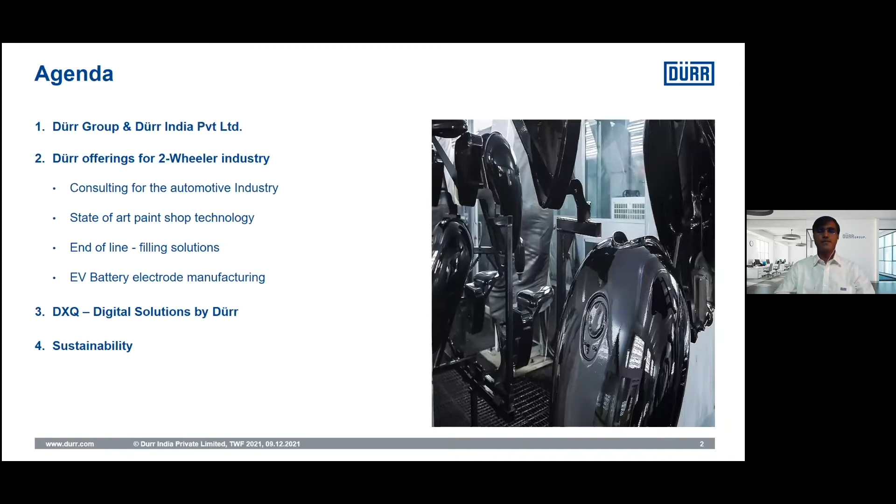So let's start with Dürr Group and Dürr India. Dürr is a global market leader in plant engineering solutions for automotive industry, which began its journey about 125 years back in 1896, founded by Mr. Paul Dürr with a sheet metal processing company.

Over the years, Dürr pioneered several benchmarking technologies like Eco-Rodip for e-coat application, AGVs for paint shop application, Eco-Bell applicators with color change time in just 4 seconds, Eco-Dry Scrubber Booth, 7-axis robot without a rail, and VOC abatement system for paint shop, and the latest is 100% overspray-free application technology, just to name a few.

Dürr Group operates under 3 global brands: Dürr Systems AG, Carl Schenck AG, and Homag Group AG. All are market leaders in their respective markets. Dürr Group is a 4 billion euro company with over 16,500 employees. In 2020, due to the pandemic, major investments took a hit, with net sales of 3.3 billion. However, in 2021, we expect to exceed 4 billion in sales.

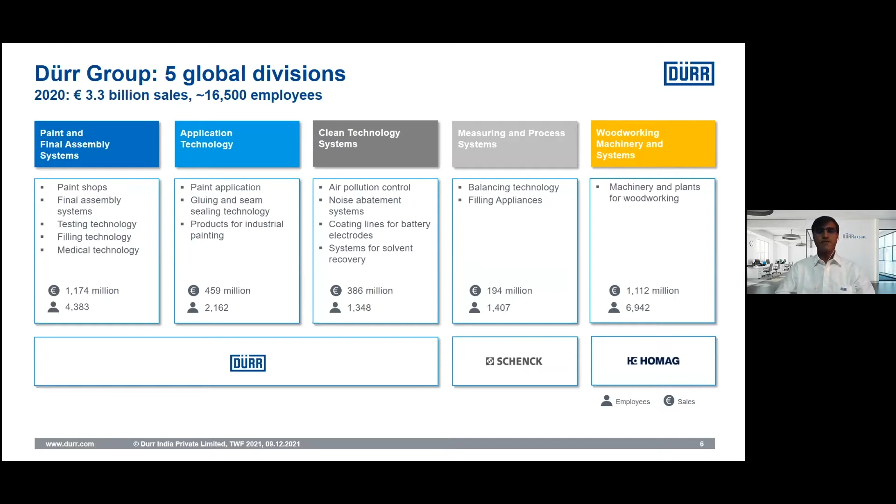Dürr operates under 5 business units: paint and final assembly systems for turnkey paint shops and final assembly lines, application technology for paint robotics and circulation systems, clean technology for exhaust air pollution control, measuring and process systems, and woodworking machineries and systems. Dürr in India is also celebrating its 25th year in financial year 2021-2022, with 341 employees serving 30 plus OEMs.

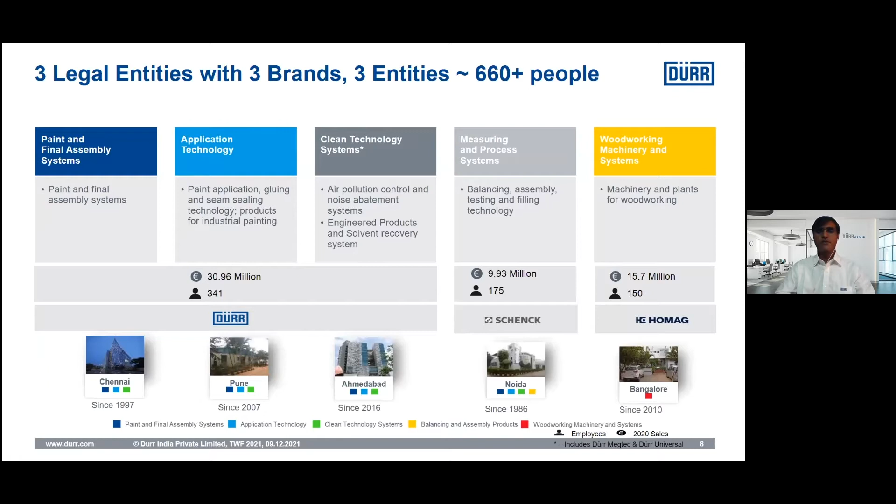And more than 50 plus installed plants, with headquarters in Chennai. Dürr India operates similar to Dürr Group with 5 business verticals, and has strategic presence across the country from Chennai, Pune, Ahmedabad, Noida, and Bangalore. Dürr India's journey for the two-wheeler industry began in 2010 with the first two-wheeler paint shop for Mahindra two-wheeler.

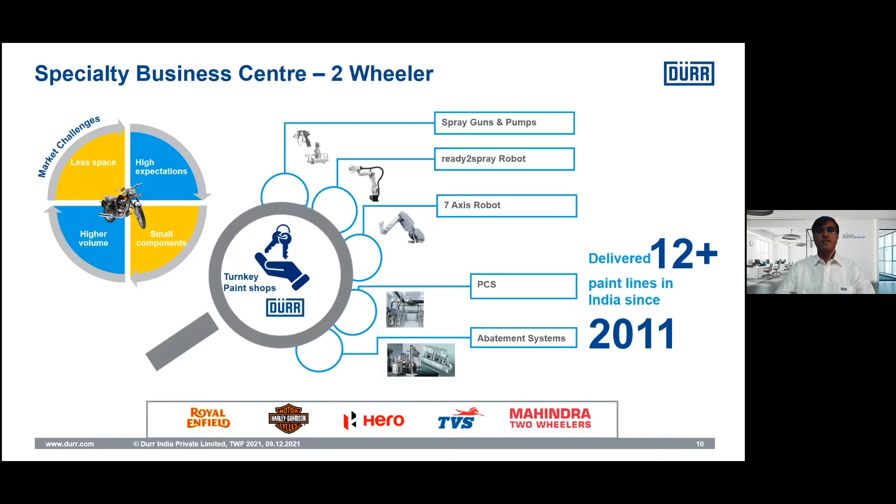Followed by Royal Enfield, TVS, Hero, one after the other, and Ola Electric in the last year. With a cumulative volume of more than 50%, two-wheelers in India are produced today from Dürr paint shops. Dürr India within Dürr Group is also recognized as a Center of Excellence for two-wheeler business for the global market, with expertise and learnings of over a decade now.

Let's look at what are all those two-wheeler Dürr offerings for. Dürr specializes in complete solutions from factory planning and consulting to body and paint shop, pre-assembly, and final assembly lines, with digital solution integration and MES, irrespective of third-party PLCs.

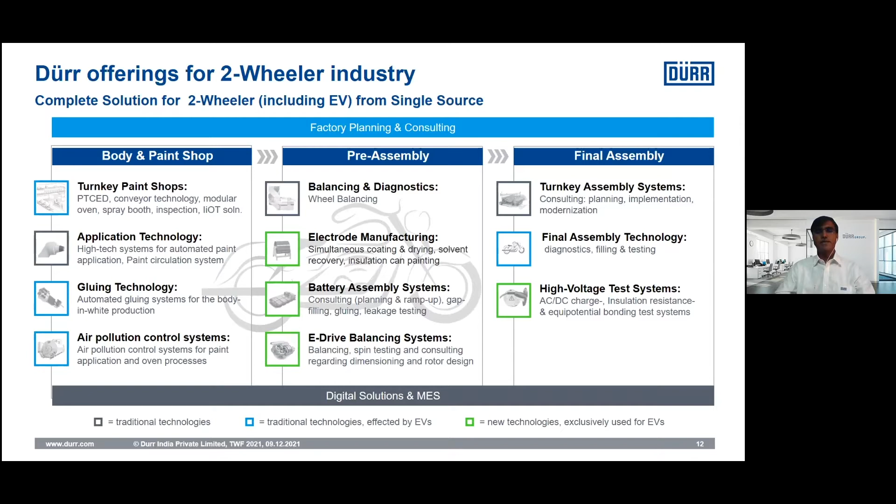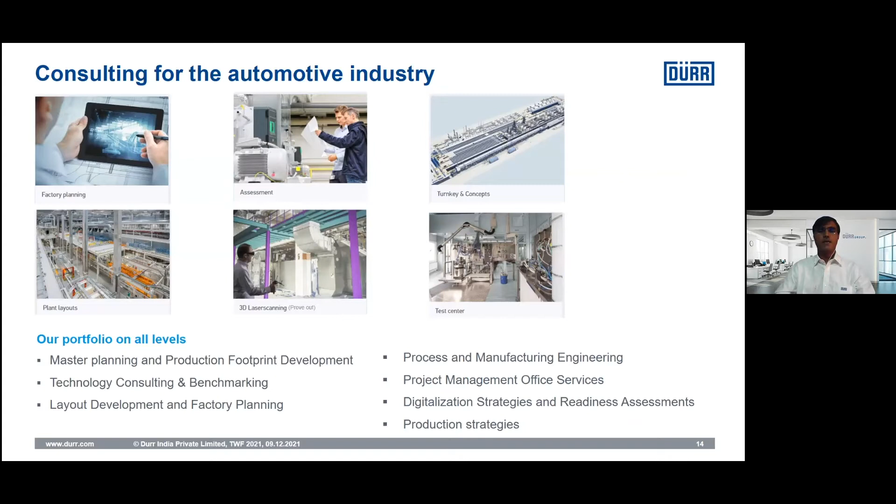The green box items are the latest technologies for EVs, like electrode manufacturing, battery assembly systems, e-drive balancing, and high voltage test systems. With its process know-how and expertise over the years, Dürr offers consulting for the automotive industry to realize your idea up to SOP. The range of consulting services includes factory planning, assessment, turnkey and concept development, plant layout evaluation, handholding until go-live, and establishing test centers too.

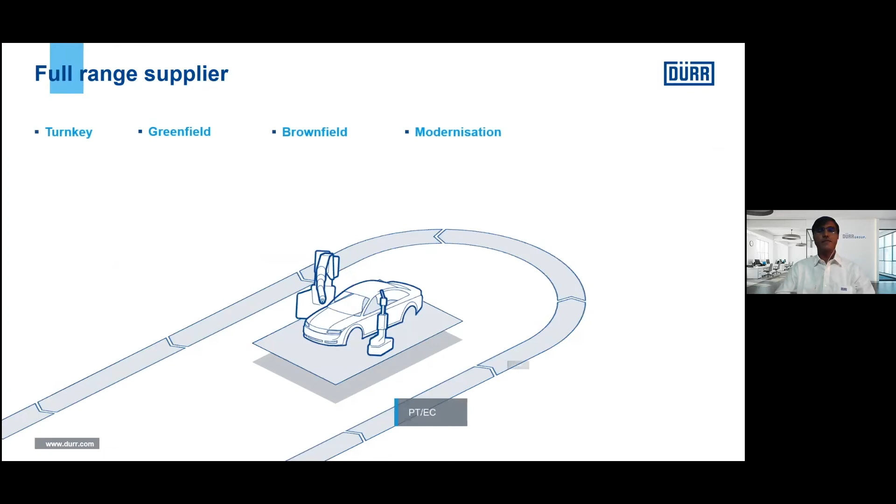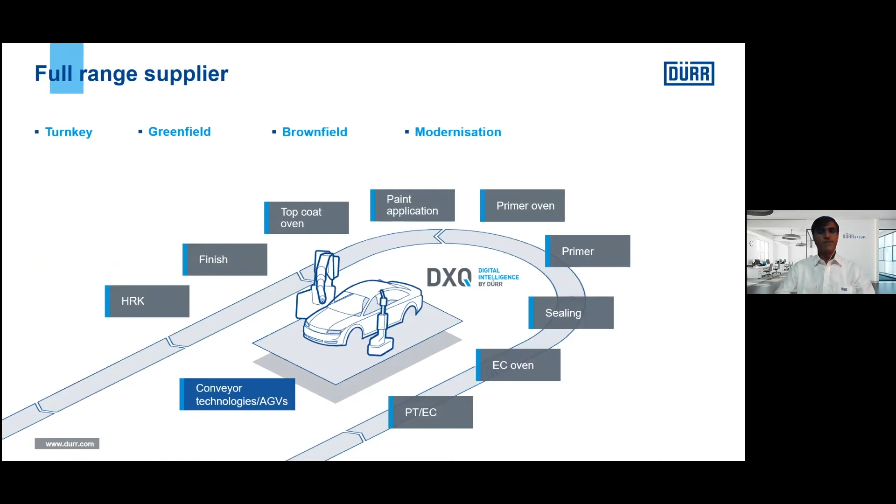Let's deep dive into technology enablers for the paint shop. At Dürr, we are a full-range supplier. One reason behind this is our integrated portfolio, which masters all processes. Every single one of them is designed up to a turnkey solution, not only in the paint shop, but also other allied processes, fully adaptable for greenfield, brownfield, or modernization of existing ones.

So let's begin with our surface treatment for two-wheeler frames or chassis and other child parts, which are derived from sheet metal. Dürr specializes in building complete surface treatment plants with consistent bath parameters, digital controls, and Dürr Eco range of products like Eco Multicyclone for coarse filtration, Eco Magno for ferrous particle separation from the bath, Eco Cell for oil separation, and the energy-saving EcoDC MACs modular anode control during the electrocoating process.

EcoDC MACs improves the power factor compared to the conventional thyristor rectifier. It builds higher coating quality due to a lower ripple of DC power supply. It also eliminates the need for a standby rectifier, since power is fed to EcoDC MACs from the regular paint shop grid. No separate transformer for galvanic separation is required. So EcoDC MACs is a hardware product used for modular anode control during the electrocoating process.

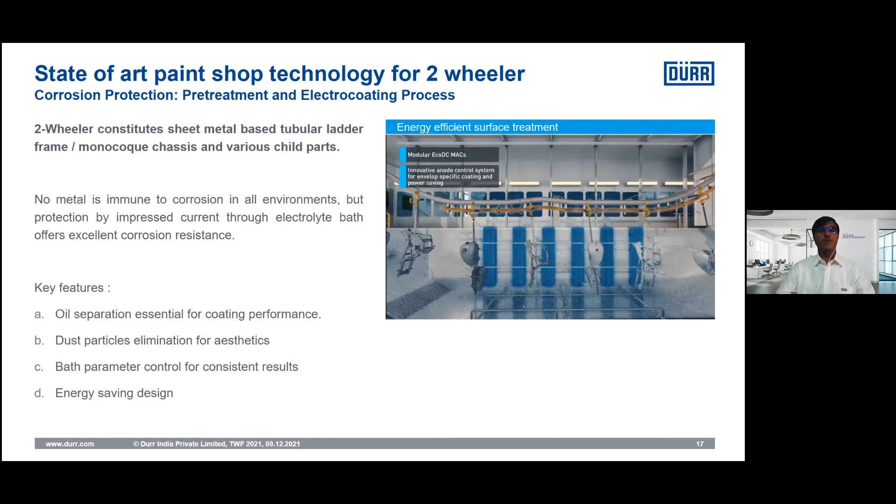Let's take a look at the second product, which we would like to stress upon: a dry type spray booth. With upcoming stringent environmental concerns about water and air pollution, water is seen as a scarce resource today, and with increasing wastewater treatment compliance requirements, online waste monitoring and control is the need of the hour.

Dürr offers a future-ready solution of dry scrubber spray booth, which eliminates 100% water and dosing chemicals, civil sludge pits and trenches, and hume pipes, sticky paint sludge handling and disposal issues with wet type separation booths, and also maintenance fatigue with high energy intensive operation.

These dry scrubber spray booths are easy to maintain and meet prevailing and upcoming environmental pollution control norms. Maintenance is in place with compact and energy efficient design. In past weeks, we have won contracts to implement this technology in tractor industry and commercial vehicle.

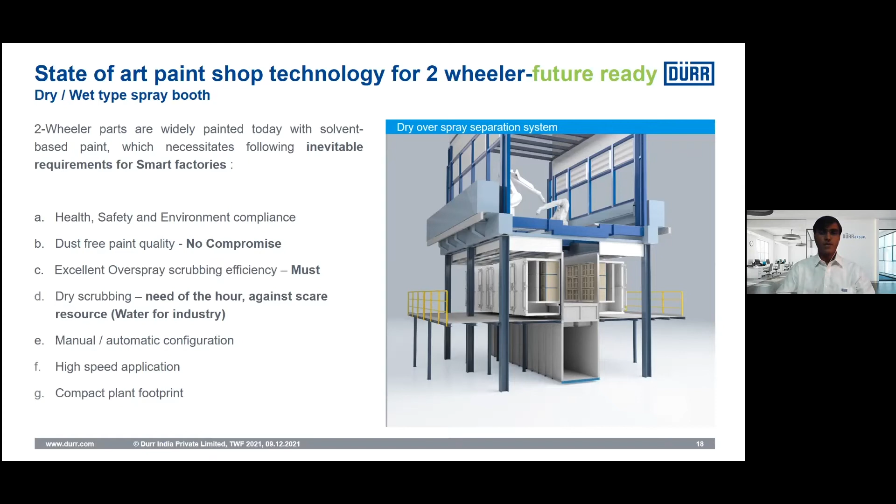After successful use in Indian passenger car industry for over 4 to 5 years now, it is gaining wide acceptance in other industries too, including two-wheeler, which we are discussing with other prospective clients.

Next is on paint application business dynamics, which relies highly on throughput and consistent quality parameters, increasing 3D profiles of today's vehicles, and with more plastics, which has got an inherent attraction towards dust, making manual painting more challenging.

Dürr offers comprehensive solutions for paint circulation, be it 1K, 2K, high or low runner, quick color change less than 30 seconds to 90 seconds depending on the type of paint and hardener change requirements, and low color change losses.

In-house manufactured full range of Dürr products includes 2K painting robots with over 20 color changers per robot, Bell atomizer with the fastest color change in just 4 seconds, manual spray guns, paint pumps, etc. Please visit our website and YouTube channel to explore various innovative product ranges from Dürr.

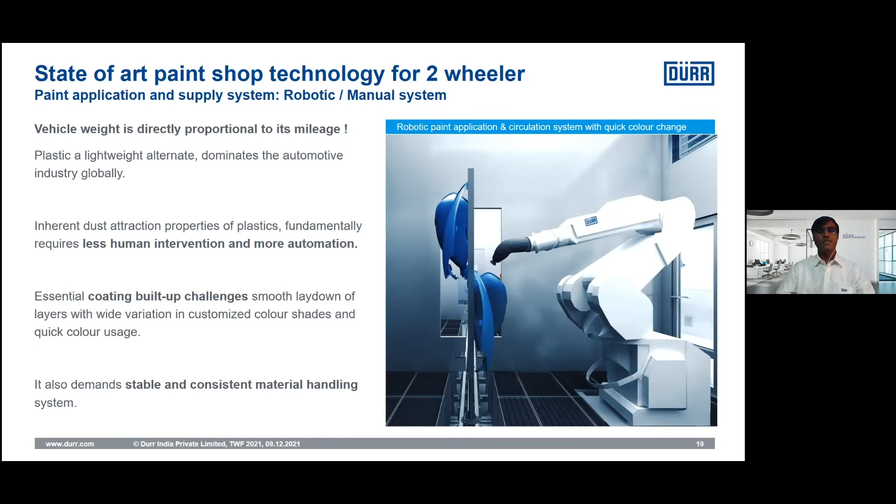Next is on VOC treatment system for solvent exhaust from the spray booths and allied exhaust of paint bake ovens. Solvent-borne overspray paint is scrubbed in spray booth, while solvent exhaust stream in dilute phase has the possibility to concentrate and feed it to the thermal oxidizers for VOC treatment before it is released into the atmosphere.

Thereby complying with environmental regulations such as CO less than 100 milligram per nm3, NOx less than 400 milligram per nm3, TOC, that is total organic carbon, less than 20 milligram per nm3, and SPM less than 50 milligram per nm3.

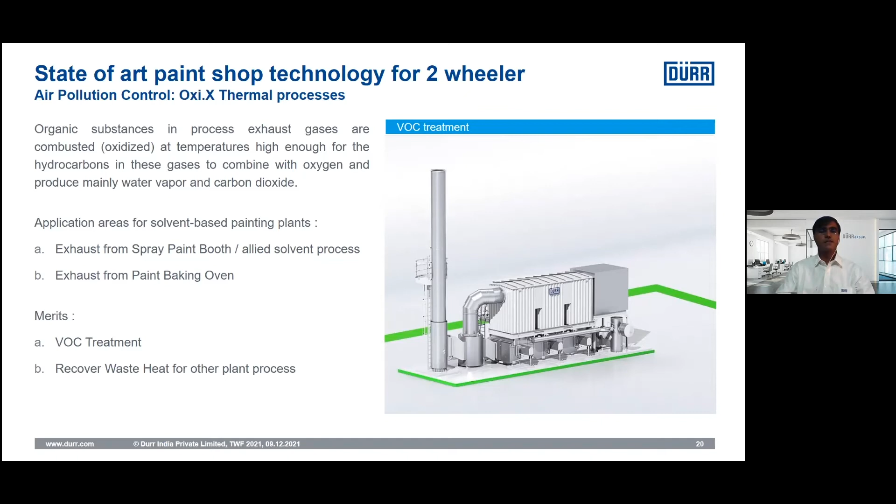Next, let's take a look at end-of-the-line filling solutions. Dürr offers a comprehensive solution for brake oil, coolant, and gearbox oil filling to IC and EV two-wheelers, including brake leak test system.

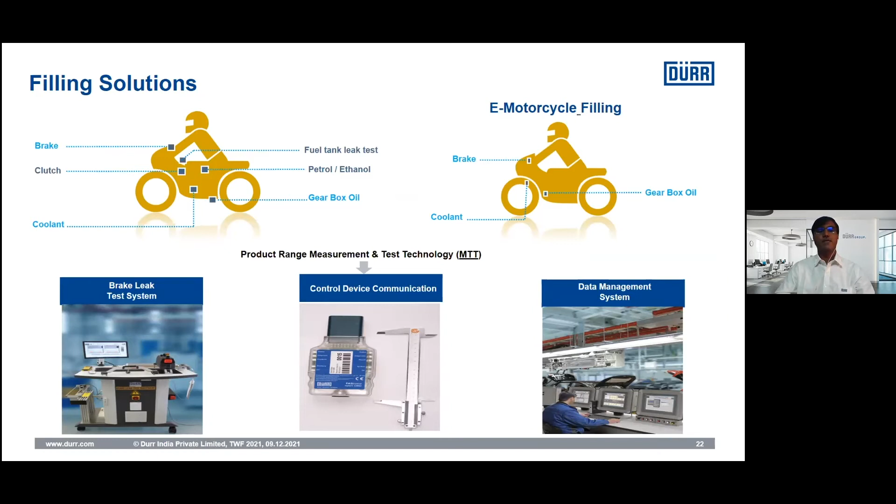In principle, be it IC or EV, we have something in common, and that is brake oil, coolant, and gearbox oil, which are covered. Filling solutions is primarily a vacuum pressure-driven filling system.

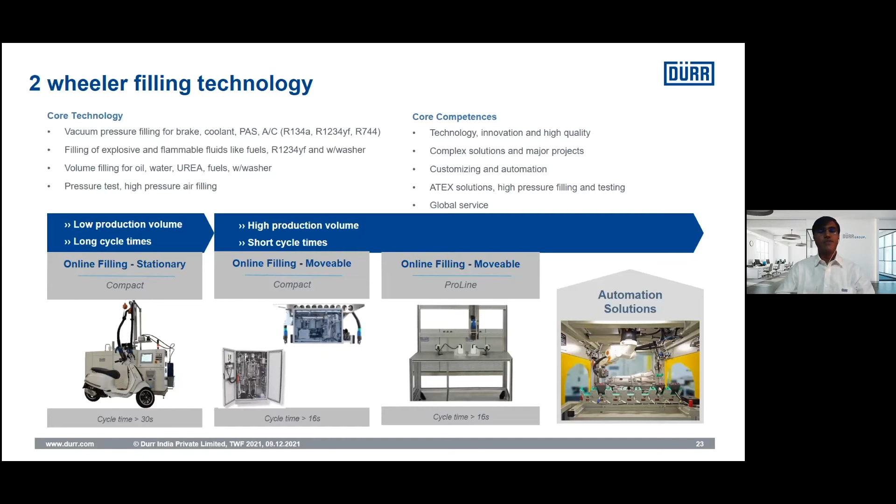For low production volume, we are offering compact stationary machines, the one which we are seeing on the left. And for high production, typically in 18 to 20 seconds, a ProLine movable machine, which moves and gets synchronized with the assembly line speed and a quick fit customizable adapters.

Typical machine configuration of a ProLine cube movable machine is represented in the photograph on the left-hand side, with integrated controls to feed in the line data with MES or ERP system.

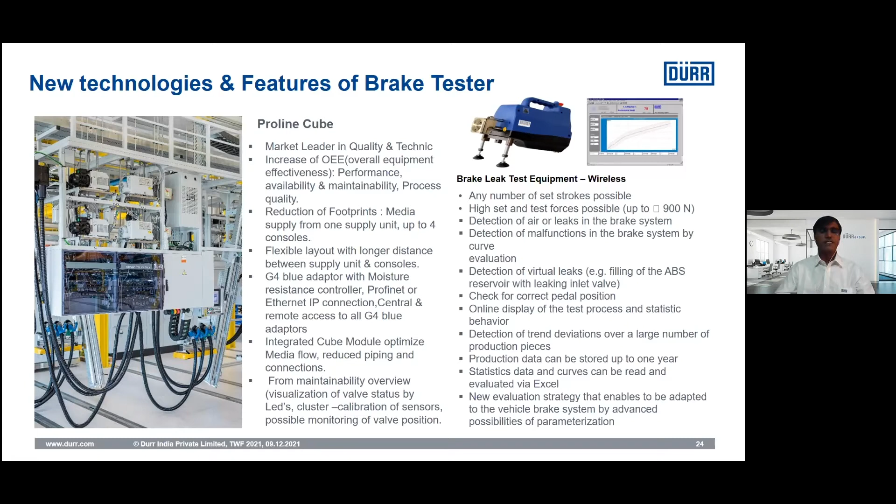Wireless brake test leak equipment offers very high flexibility. For reference, brake oil filling machines are already in use at India two-wheeler OEMs since a decade now.

Let's take a look at Dürr's technology for EV battery electrode manufacturing. Battery technology starts with a four-step process.

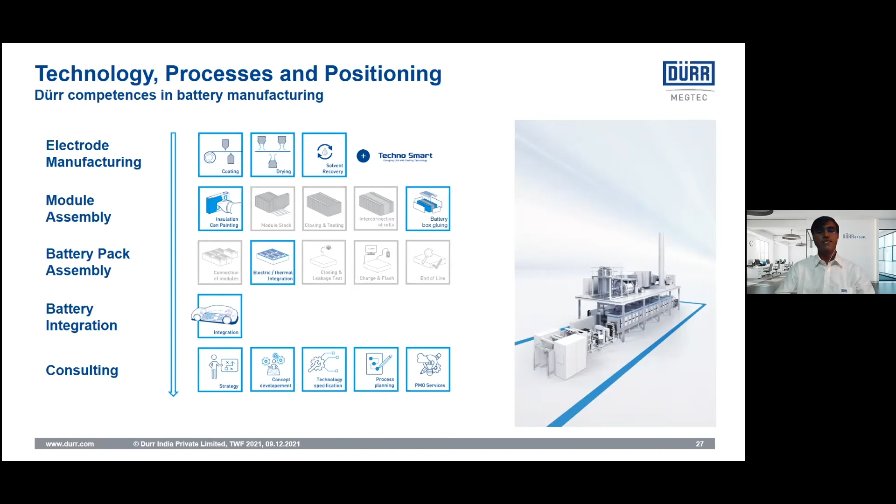Step 4 is on battery integration with the vehicle, requiring automation for integration with handling, currently being supplied for passenger vehicle and commercial vehicle, but we have the possibility to scale it up for two-wheeler as well. Consulting on various phase integration is also one of the key strengths of Dürr.

First step of electrode manufacturing is lithium ion coating from both sides.

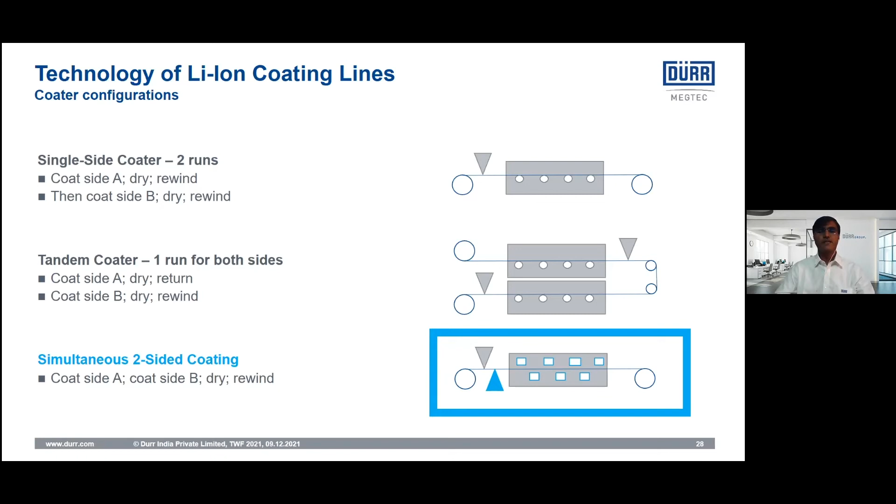Traditionally, single side coaters are run twice, while in tandem coaters, one run on both sides, whereas Dürr does simultaneous coating on both sides with tension web and flotation of film for drying with integrated solvent recovery solution.

Let's take a look at how a tension web slot die enables two-side simultaneous coating for the thin film coating application, wherein the tension web slot die coating is placed on both sides for coating with a thin layer of material.

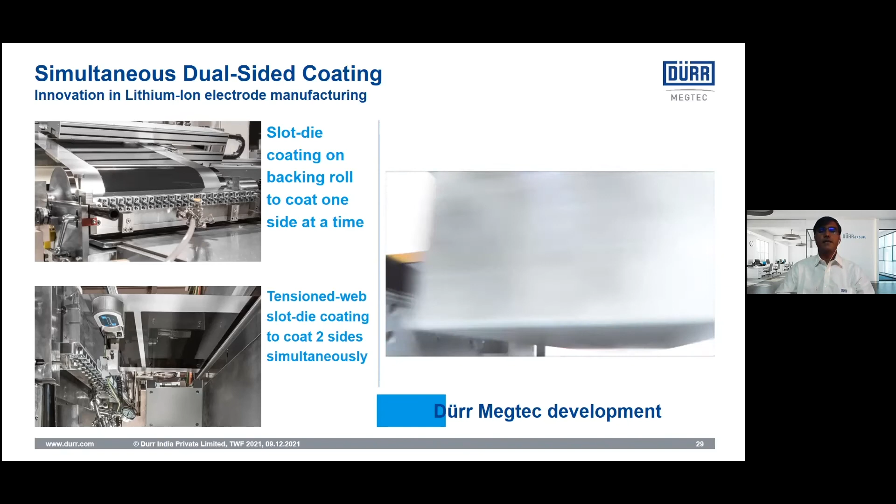Later, this tension web is kept in an air flotation dryer, where lithium ion is dried in, allowing the tension web to get dried with a flawless quality on both sides uniformly, and also the solvents which are generated in a uniform way on both sides.

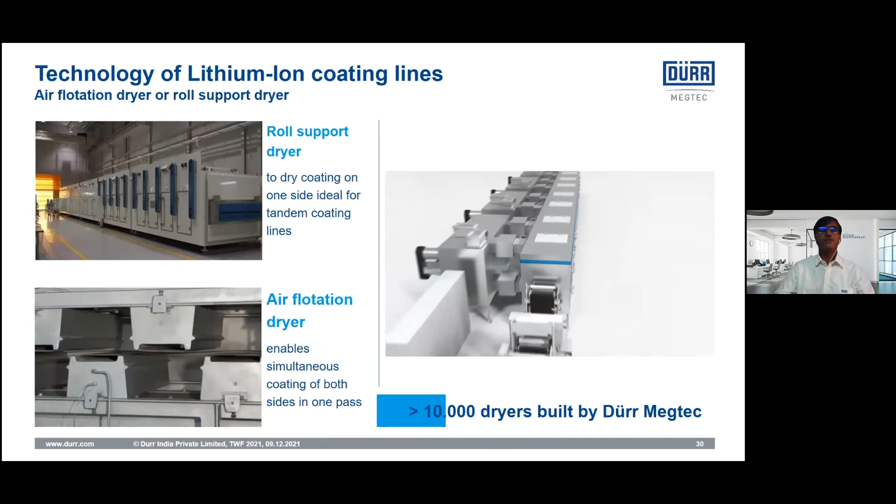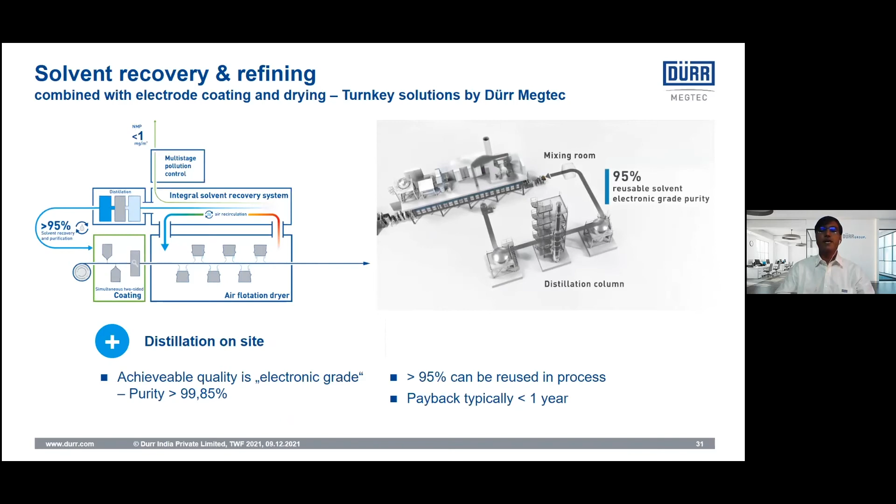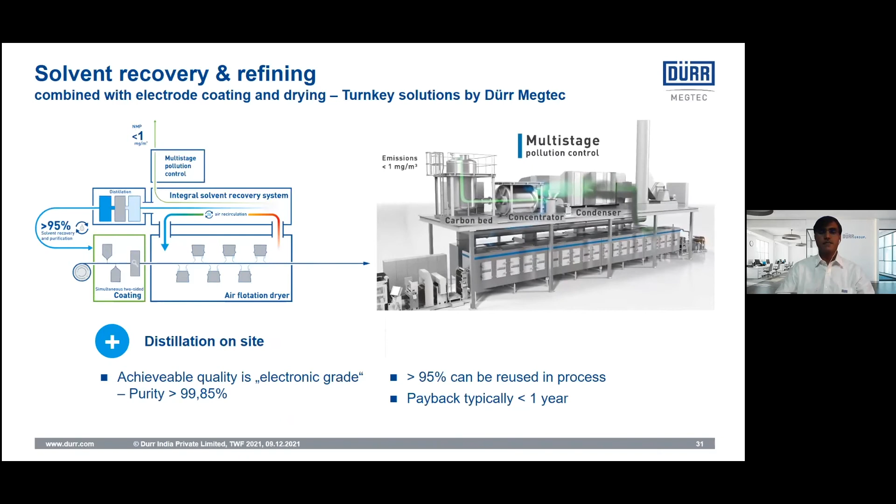During drying, the solvents which are evaporated from the film are recovered using an inline distillation process, and VOC are treated by exhaust air abatement system, achieving a high quality and pure solvent recovery with a payback of typically less than a year for mass production lines.

Dürr builds lithium ion coating lines for R&D laboratory and full-scale production with a foil width ranging from 250 mm to 700 millimeters, speeds in the range of 0.5 meters per minute until 80 meters per minute. This offers a complete capacity of 0.1 megawatt per annum up to 1000 megawatt per annum.

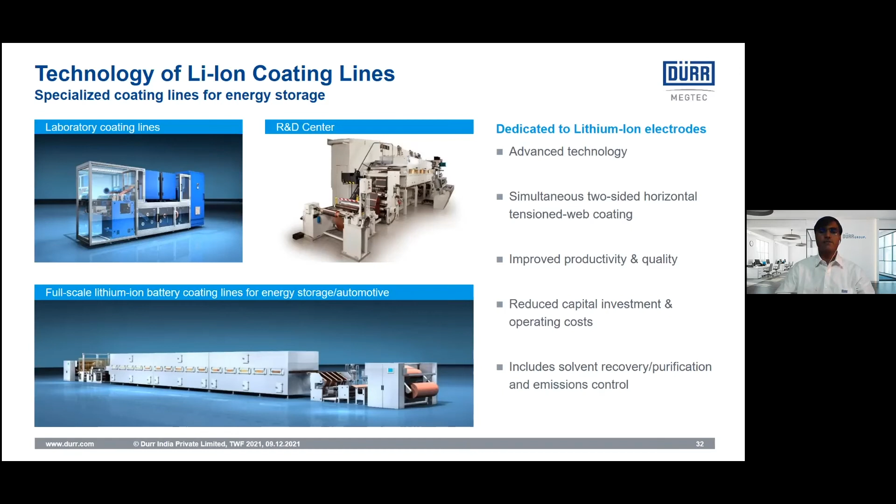DXQ is our third topic, digital solution software products from Dürr.

DXQ products are aimed at improving overall equipment effectiveness of process equipment and plant by improving performance, availability, and quality aspects. Having achieved process hardware at a peak of its performance, Dürr has unleashed further potential through the software part as to how on a real-time basis these equipments are performing, and further optimized by data collection, analyzing, and controlling with respect to a predefined set of values.

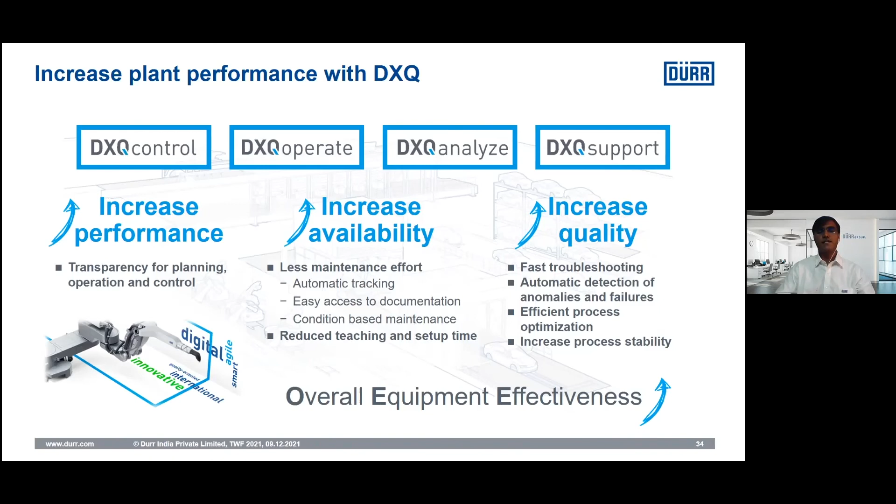DXQ solution is modular and scalable as per customer's need, and irrespective of third-party PLC integration, thereby offering seamless connectivity for the entire plant. As a basis, at the HMI level, DXQ Operate offers real-time data collection and interpretation for process optimization with respect to set values and supports maintenance ease.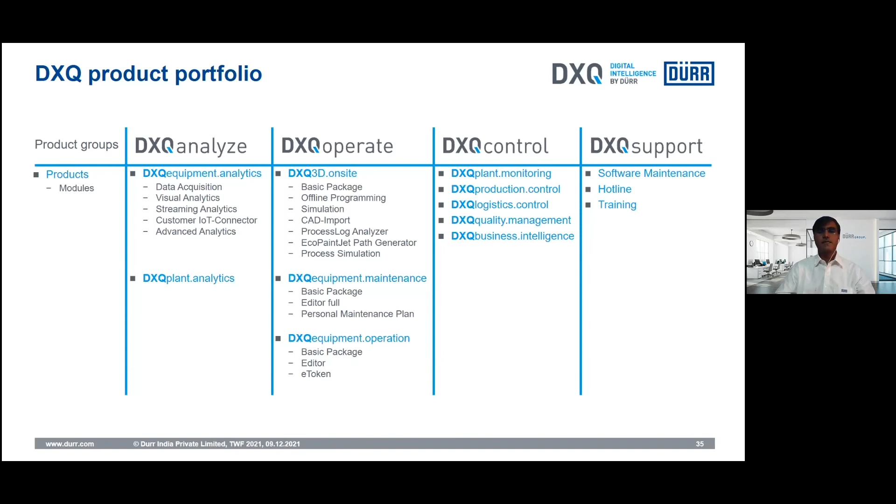DXQ Analyze further tracks and interpolates information into predictive condition and time-based maintenance activities, thereby improving resource utilization and achieving plant sustainability goals. DXQ Control enables plant monitoring for defined KPIs and quality aspects, generating customizable reports for business intelligence. DXQ Support offers on-hand training and hotline service support.

Let's look at the last topic of our presentation, which is on Dürr sustainability.

Let's look at what the sustainability challenges are when it comes to a paint shop. Paint shops typically have resource challenges in terms of reducing water consumption; use of water-free solutions is the current demand, along with recycling process difficulties.

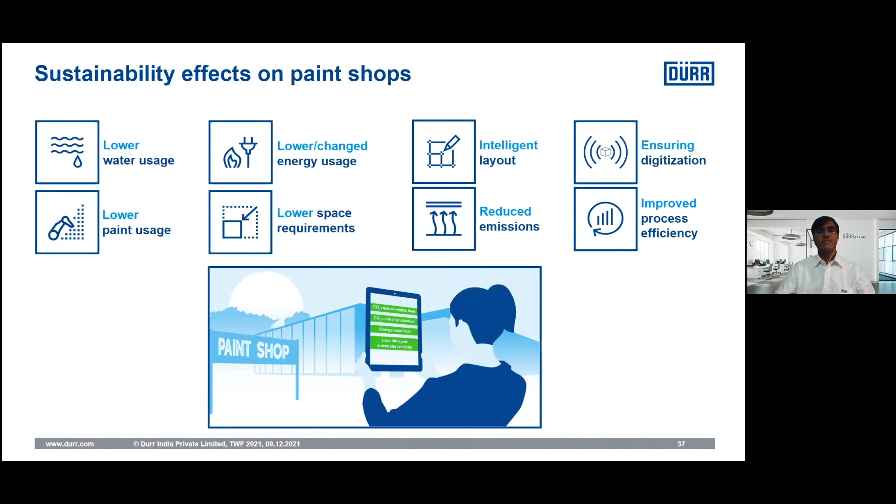High efficient paint application technologies with low or even no overspray is the need of the hour. Maximum energy efficiency by using leading products synchronized with an optimized interaction as a system as a whole. Transformation to green energy sources for optimizing plant use, minimized emission and waste, maximized reuse and recycling, intelligent layout concepts, and digitalization, which enables the further step in sustainability through intelligent monitoring systems, are some of the challenges towards sustainability.

So Dürr looks at it with two approaches. First is investment in new paint shops with a state-of-the-art solution, carbon dioxide neutral, maximum efficient plant from day one, or retrofit the existing paint shop by identifying efficient modification projects, such as wet to dry separation and step-by-step transformation from one solution to another.

The path towards sustainability, what Dürr sees, is in terms of the processes, which has a fundamental impact to achieve sustainability goals, involving different products and processes to be defined as the base of the mountain where we want to achieve. Dürr offers a complete system linkage with a range of products and digitalization, which helps through DXQ products to achieve the sustainable goals.

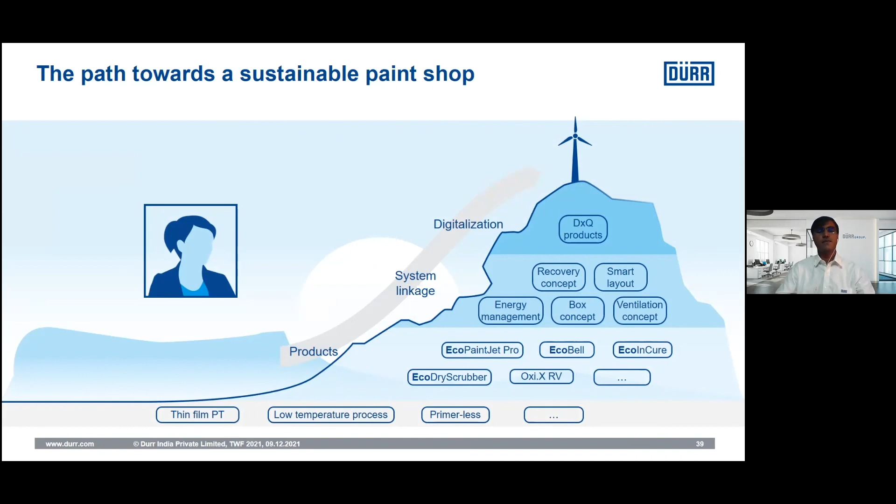Even when the responsibility of the paint process is in the hands of OEMs and the chemical material supplier, Dürr can participate in evaluation of the new processes from the respective equipments in the whole project.

Let's discuss your vision and feel free to contact us on what processes you would like us to explore and develop a suitable solution with an impact regarding energy and material consumption and CO2 emissions.

Let us reach your target jointly by developing an intelligent layout, ensuring digitalization, improved process efficiencies, and reduced emissions together for a sustainable transformation. Looking forward to your opportunity. Thank you.